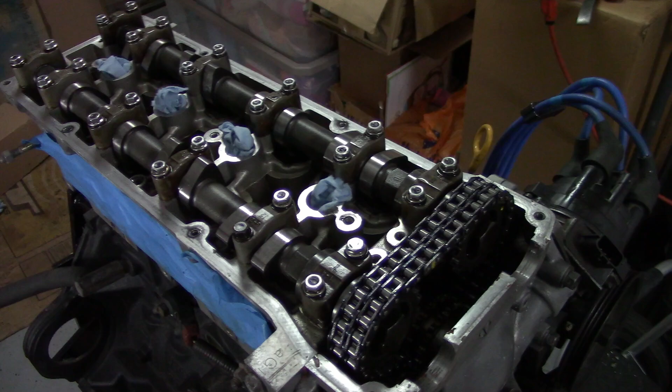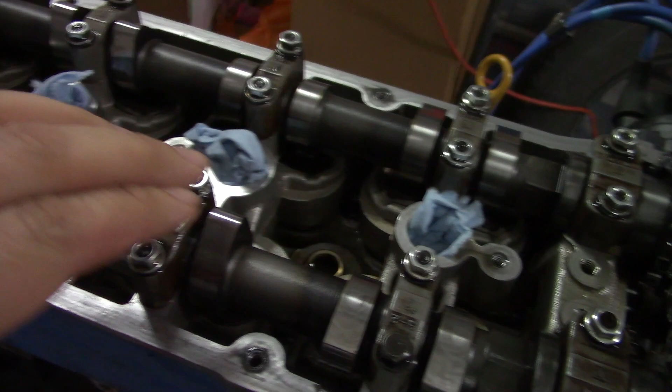Alright, what we're going to do today is check the valve lash for the cams. These are bucket over valve spring, and they have the shims like I've shown in previous videos.

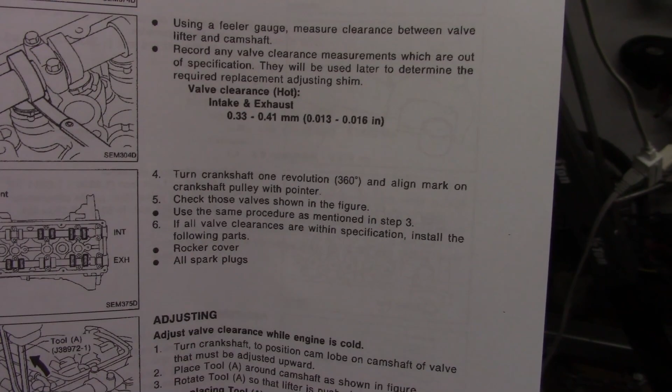So I've researched a couple of different ways on how to do it, and also a couple different specifications. The manual says the spec is 13 to 16 thousandths, and it has the procedure on how you do it. So these are not stock cams, these are 264 cams. I looked at another site that had a spec of, I think, 10 to 12, and that spec was for the 264 cams. So we're going to shoot for 10 to 12.

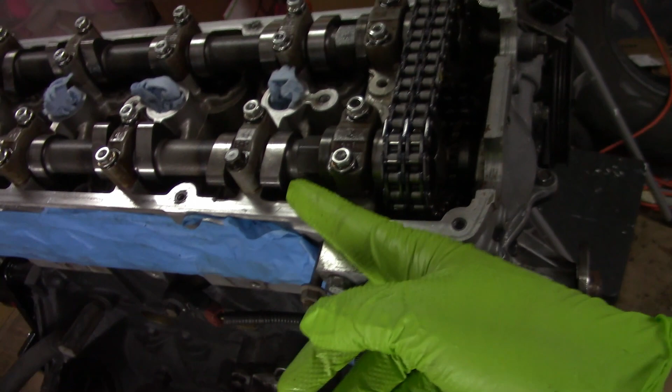I've already checked a couple of them, and they're not even 10 to 12. What I did is I set the engine at top dead center on number 1, so I have the intake and exhaust cam lobes pointing away from each other. That's how I took the first measurement, and I think they were all like between 8 and 9 thousandths. So I'm going to spin the engine around so that my lobes are pointed upward, like how they are here on the intake for number 2, and I'm going to see if it's any different, and basically go from there.

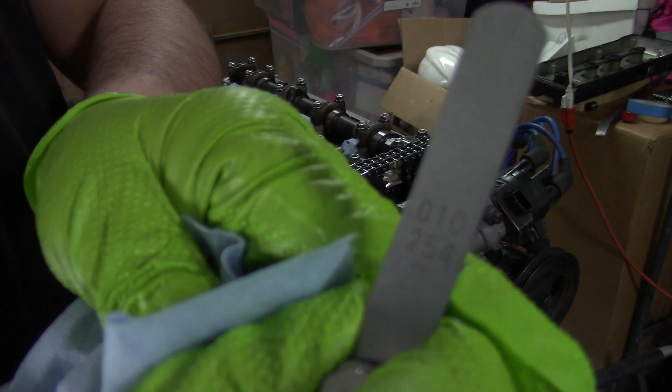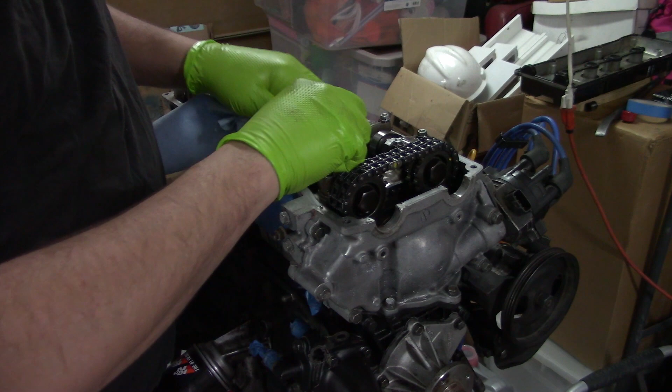Alright, so I have the 10 thousandths feeler gauge right here, and with how I have the cams currently, I'll take this feeler gauge and stick it in between the cam lobe and the bucket, and that one is good at 10 thousandths. So if I pull out the 11 thousandths, check it again - too tight. So this first one on the exhaust cam is coming in at 10 thousandths.

So I've got 12, 10. So I've got 8, 9, and 10 out here now. And I think this one was coming in at 8. So we're good there at 8. We're still good at 9. We're actually still good at 10 on that one. So again, I'll pull out my 11 - we're still good at 11. We'll check 12 - so it is a little rough at 12.

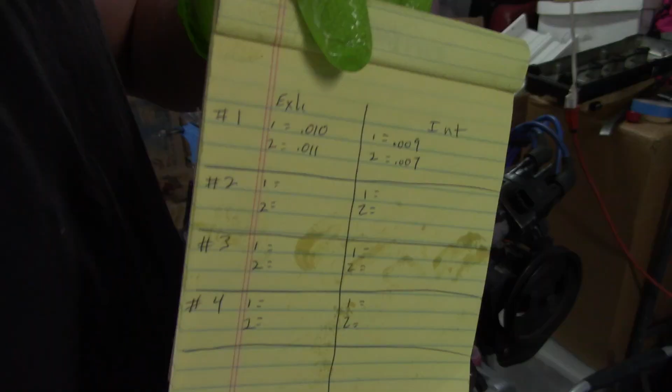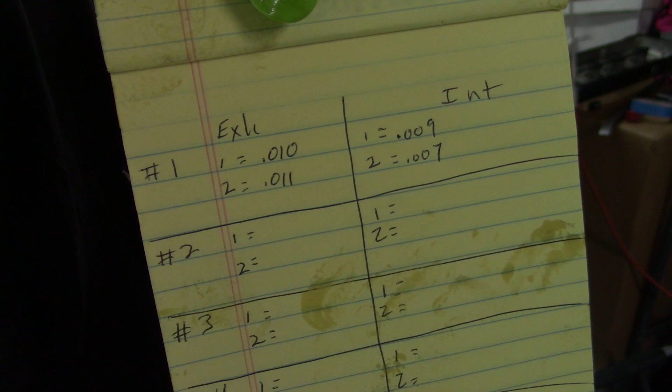Alright, and just to show you all how I'm keeping track of what my measurements are, I've written it down on a list here, and this will be so that I know basically what all my measurements were. Once I've got all my measurements done, I'm going to have to get the shims out that are out of spec, measure their thickness, and write that down. There's a conversion that you can do that you can basically determine the thickness of the ones that you need to be within spec, and it's covered in the manual.

So we'll continue on. Okay, so sideways view here, but one thing I wanted to point out was that I checked the 2 exhaust lobes for cylinder number 2 with the cam lobes pointed up, and they were both coming in at 16 thousandths, which is the top of the hot spec on the stock cams. So I came over here to the intake, the first intake lobe on number 4. That one was reading at 7 thousandths with the cam lobe facing outward. So I spun it enough to get it to where it was pointing upwards, just to double check it, and it was still reading at 7 thousandths. So definitely out of spec. And I don't think it matters if I have the cam lobe pointing outward or pointing upward - I'm still going to get an accurate check.

Now I will double check that when I get cylinder number 2 here to where the cam lobes are facing outward, and I'll double check my spec just to make sure.

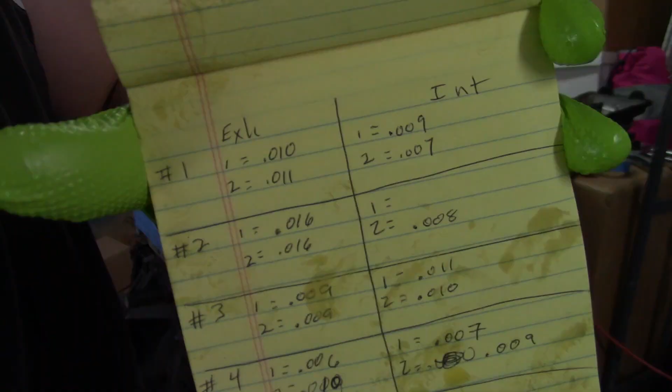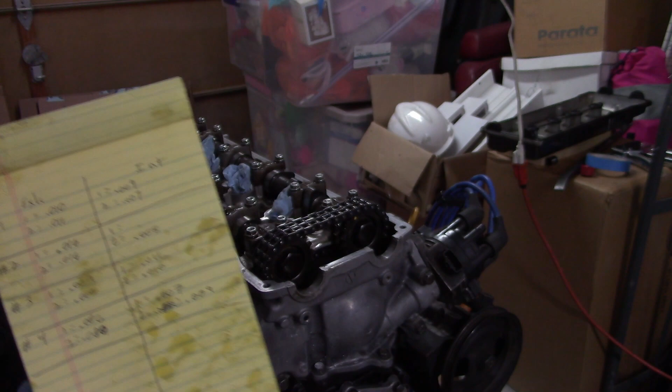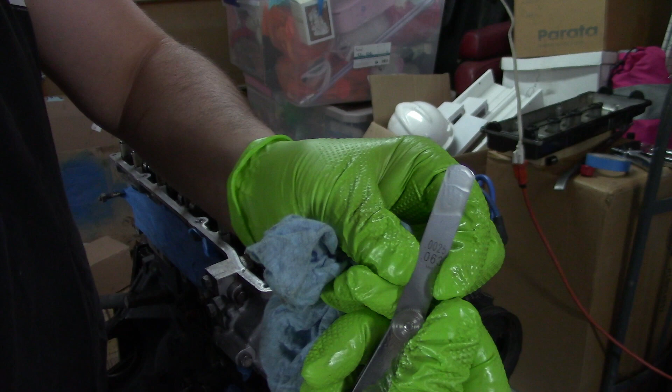I've got all my measurements except for one, which is the intake valve on cylinder number 2 on the intake side, and the gap is so tight that I can't even get my smallest feeler gauge in there. That's 0.0025 - way too tight, and for sure will cause a bad day. So I've got all my measurements, and now's the fun part.

Alright everyone, it's been a couple of days. I got the tools that I needed to properly do some valve adjustment. At this point I have checked all my valve lash and written everything down. I know what needs to be adjusted, and I've already adjusted a few, just trying to figure out how to use the tool. So I'm going to show you guys how I am using the tools. I can't say for sure that it's the correct way, but it's the way that I have found works. I'll show you the process of what I'm doing to figure out what replacement shim I need to put in the buckets to make sure my valve lash is all good. So let's jump into it.

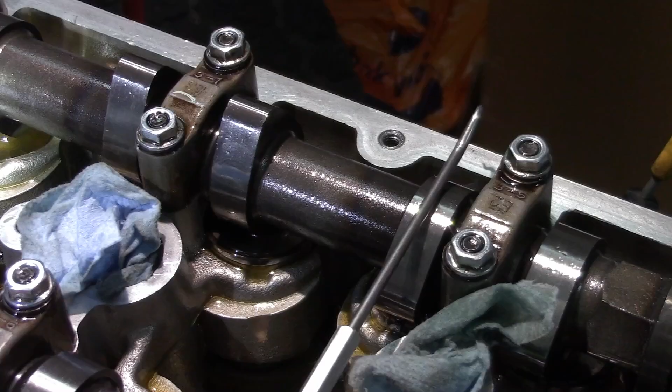According to our measurements previously, the exhaust on cylinder number 2, both of these were coming in at 16 thousandths. I've already adjusted number 2 over here. I got it as close as I could with the shims that I had, so I'm probably going to run into the same problem on this one. After I put in the new shim on this side, I double checked the gap and it was 0.009, which is still below the 10 to 12 spec that I'm shooting for. But as we go through this process, I might come up with some better shims, or I may just have to order some. Anyway, here's what we're doing, and I hope the picture's coming in alright.

I've moved the little notch here right into the middle, and I'm going to take my pliers and compress the bucket down. Unfortunately I'm going to have to take that light away, but hopefully this comes out okay for you guys. Now you want to make sure your tool is away from the cam lobe. You can't see just because of the angle of the camera, but I can see. And then you just twist it like that.

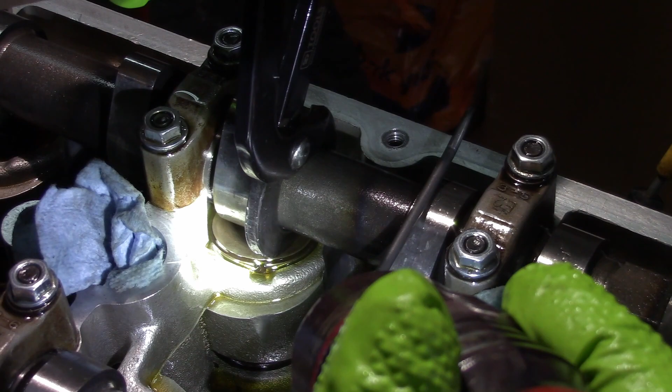Let me grab my flashlight here, and you guys can see that the valve is going down. So I have it down.

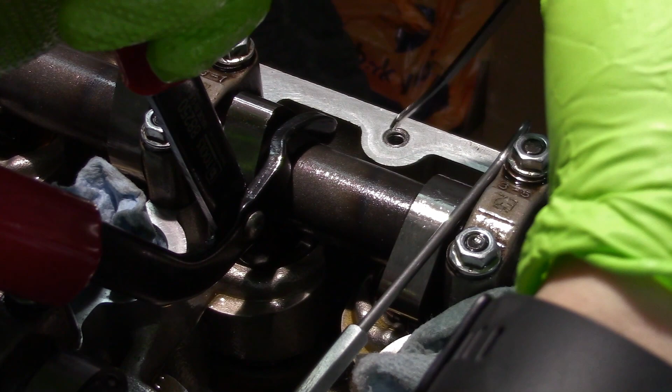Now I'll take my tool here, and you want to stick it in this side down as opposed to this side. I know this angle just really sucks, but I'm going to go from the back of the cam right up against the lip of the bucket, and I have my tool in there. Okay.

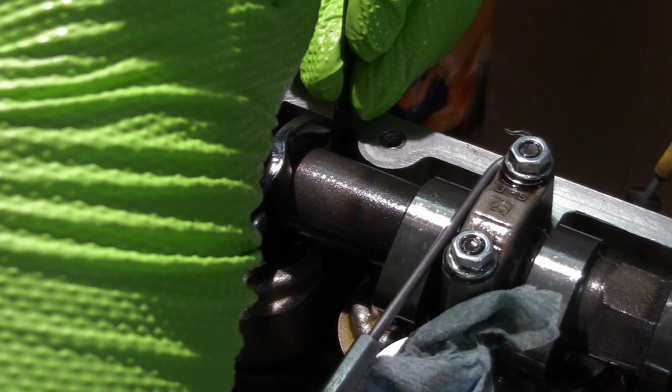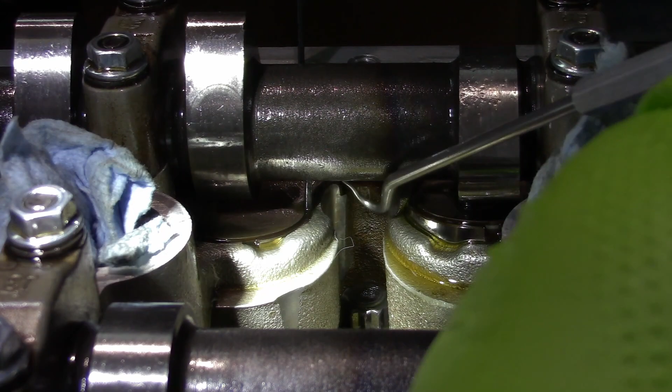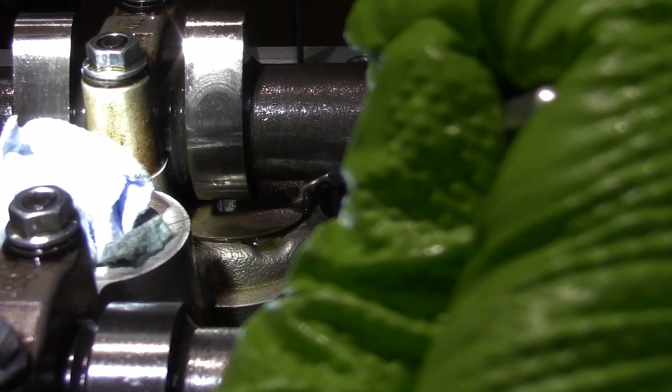Yeah, let's see here. Alright, so it's in there. Hopefully this is a better angle. Ideally what you want is the tool right along the edge of the bucket, and if you can still spin the shim around, then you know you're good. I can't quite spin the shim around, but we're going to try it.

So what I'm going to do next is take my pick here, and I'm going to pry the shim out. I'm going to pop it loose so that I can pull it out. Now, one thing you're going to have to watch for is, if you use the method the way I did, you have to make sure your tool is far back enough that when you pop the shim loose, you can still grab onto it with a magnet and pull it out. Hopefully we're there. If not, we'll reset.

Yep. We're not quite there.

Okay, we should be there now. Alright, and I got it popped loose. We just come in here with our magnet, and it comes out.

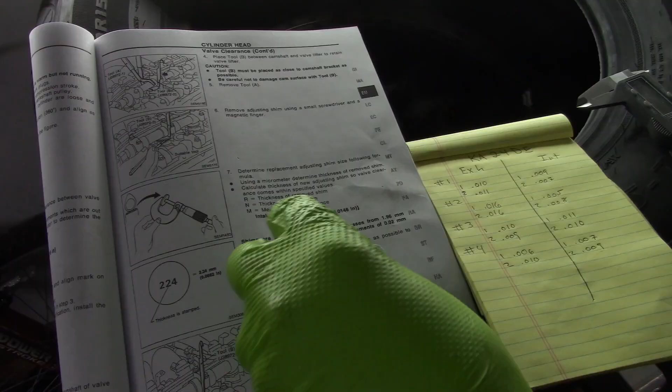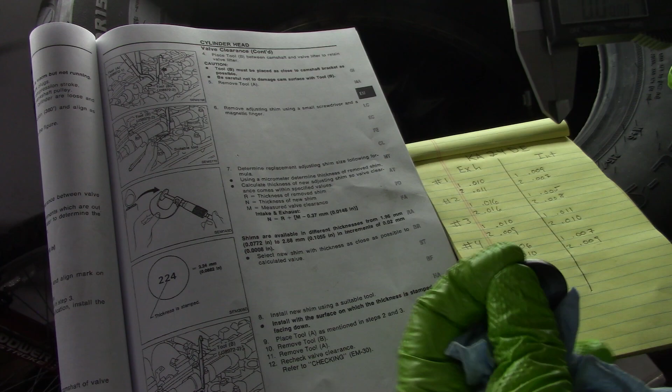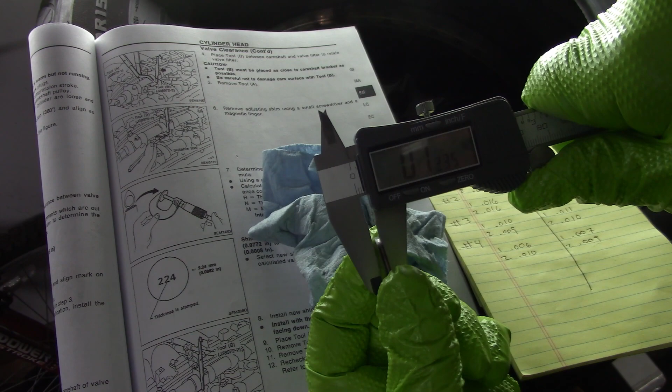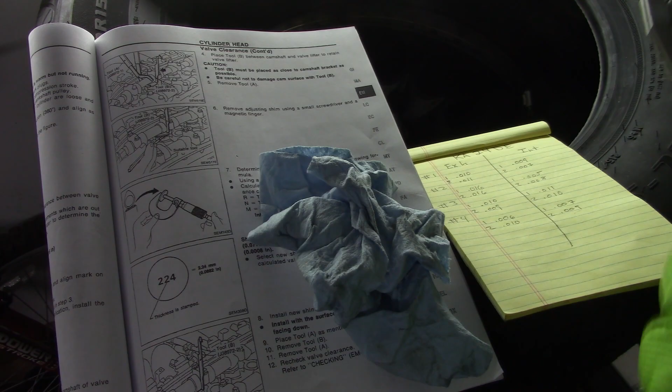So I have my micrometer here, and I'm going to turn it on. I'm going to zero it. Okay, and how I check these is, hopefully you guys can see that okay. Yeah, just like that. And I'll spin it around a couple of times just to get consistent readings. So we have 0.0830. Okay, yes, 0.0830.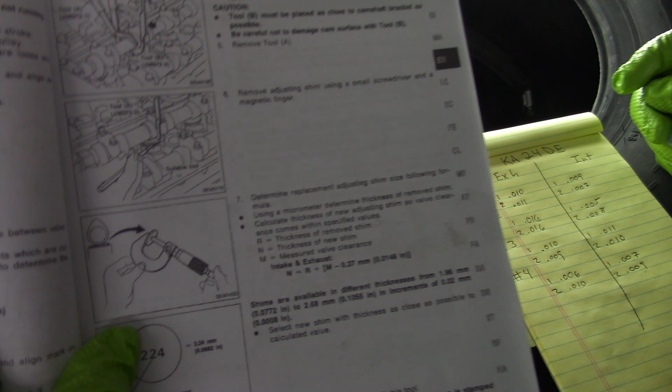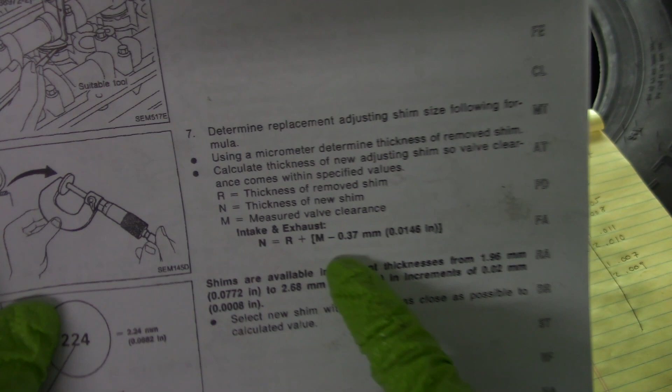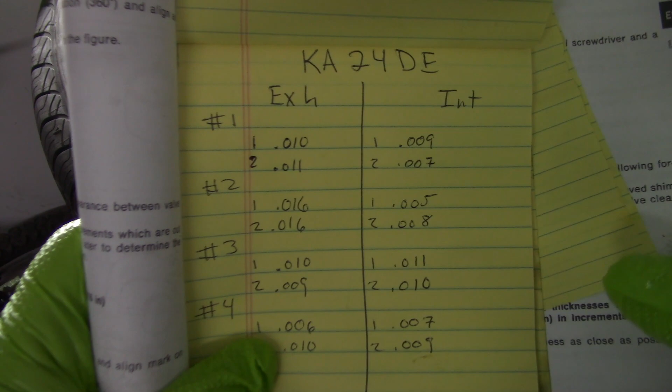So 0.0830 is what we have measured. And when we look at the manual here, the conversion that we're going to use is this one right here. So M would be the measured valve clearance. Hopefully you guys can see that alright. So the measured valve clearance for this one was 0.016.

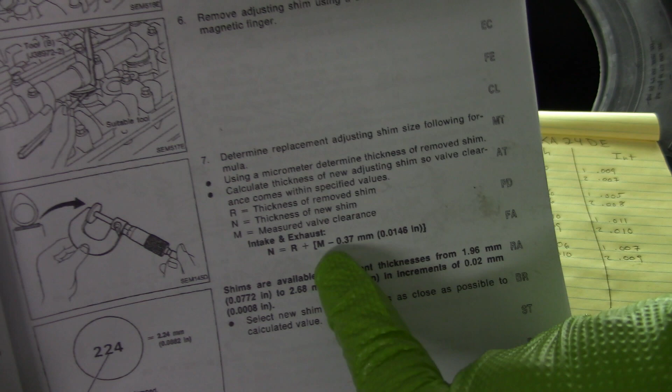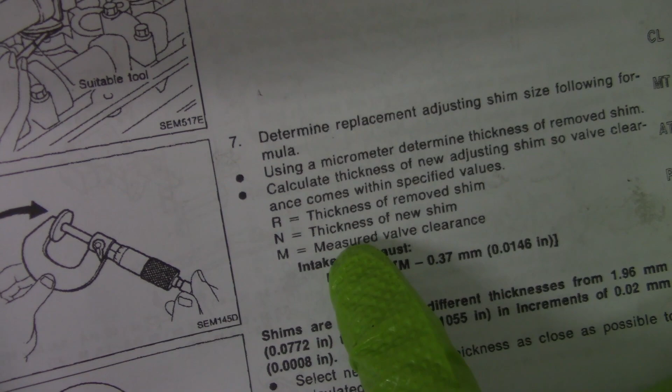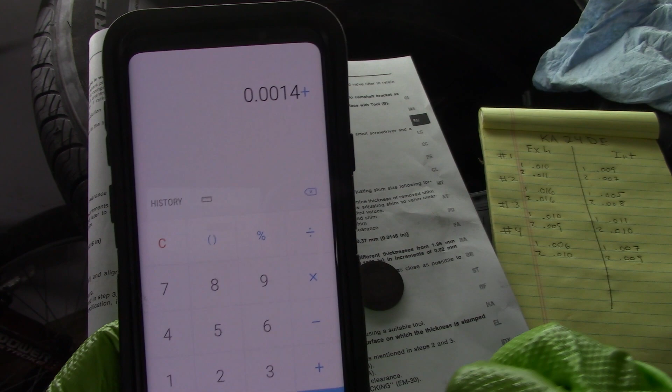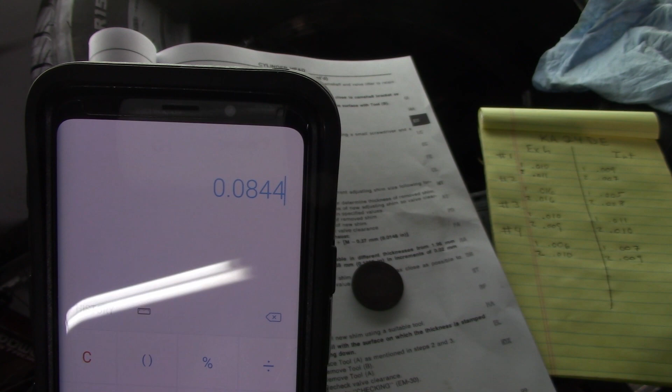And we're going to take that minus, I'm working in inches, so minus 0.0146, and then we're going to add that to the thickness of the removed shim. 0.016 minus 0.0146 equals 0.0014, plus the thickness that we measured, which was 0.0830. So this is the size of the shim, or the thickness of the shim that we need.

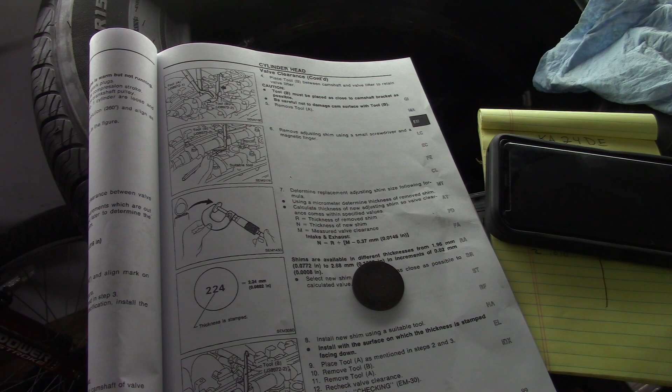Now unfortunately I don't have one because I just used the one that was closest to it. But we'll find one that at least maybe gets us close. Alright, and we've found a shim that's as close as we're going to get for now. It's going to make the gap smaller than I want it to, but that's fine. At least for now, because I might be able to sacrifice some from the other engine.

But basically, they should just sit right back in there. And then you take your tool. Again, be very careful that you do not hit the cam lobe. Depress it just enough to get your tool out. There you go.

So that was a quick demonstration on how I am using the valve lash adjustment tools. I don't know if that's the correct way to do it, but that's the way that worked for me. Hopefully if you guys run into anything like that, this method works for you also. If you have a better method, let me know. Anyway, I'm going to check the rest of these. I don't think I'm going to film it, it'd be a time lapse. Maybe I'll do that, I don't know.